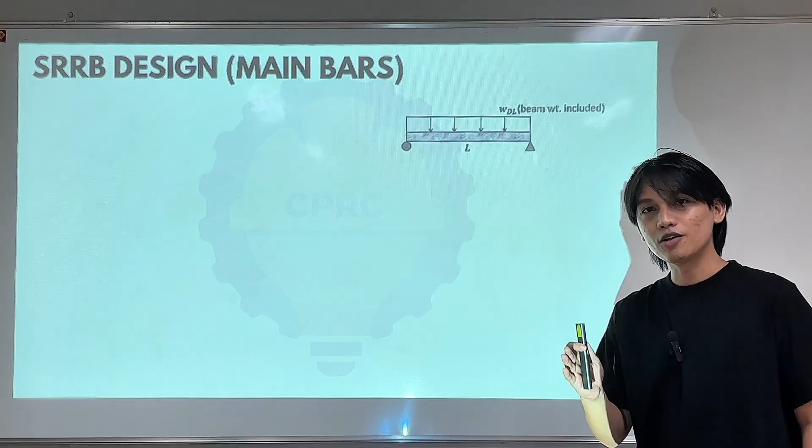Let's say we have a simply supported beam with length L, with a uniformly distributed dead load including the weight of the beam, and a point live load. We are tasked to design this as a singly reinforced rectangular beam.

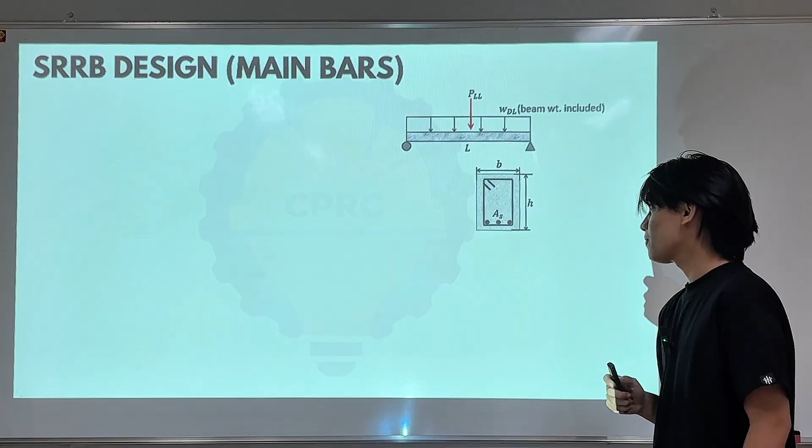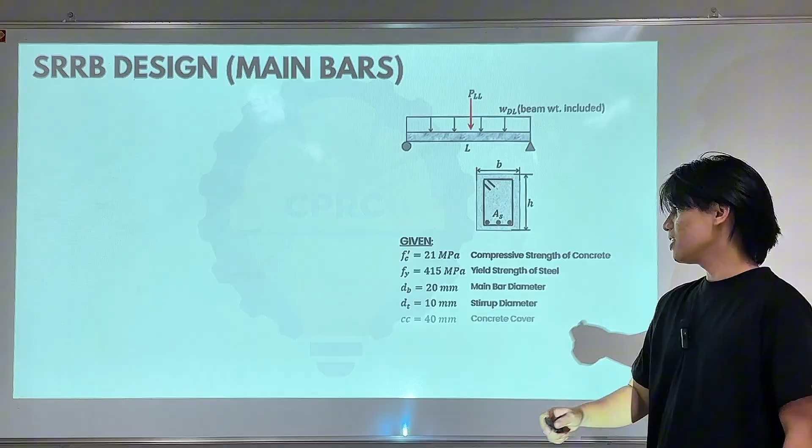Let's say given to us are the dimensions, the width and height, the strength of the concrete and steel to be used, the diameter of the main bar and the stirrups, and the concrete cover. If the concrete cover is not given, we should memorize that value - it's standard at 40 mm for beams.

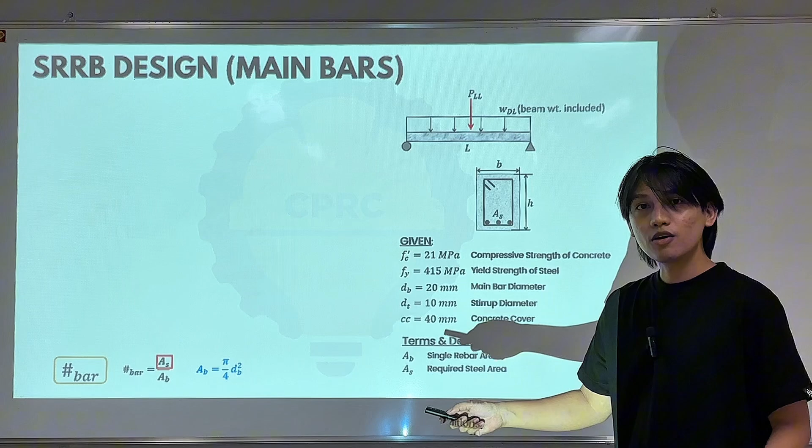So let's focus on that. How do we solve for AS? To solve for AS, we just need to use our analysis and design formula in LRFD, which states that our ultimate moment MU should be less than or equal to our factored moment capacity, phi MN.

Let's expand this. MU and phi we retain, while MN we expand into that expression.

Now where did this expression come from? Quick recall - it comes from our stress diagram, where our tension force is moment-summed with our compression force, and that is simply equal to As times Fy times D minus a over 2.

We used Fy here instead of Fs because we are designing the rebar to yield for a safe design. And the 'a' here, we express in terms of the sectional property.

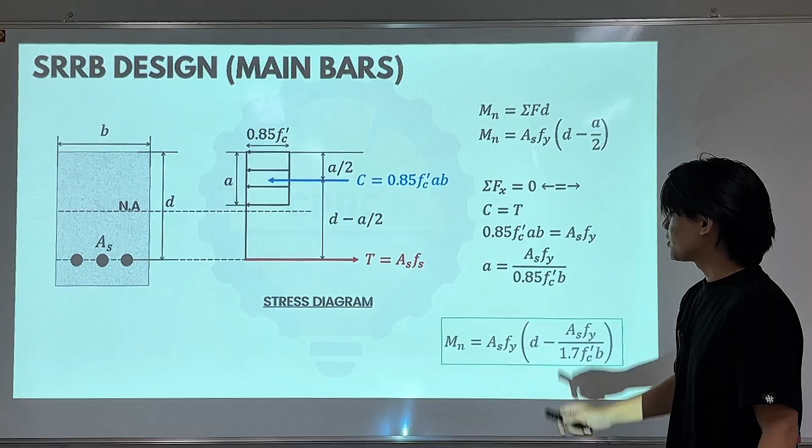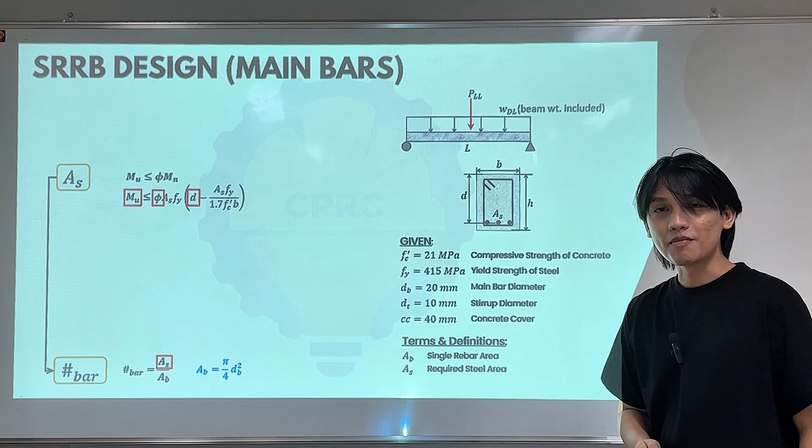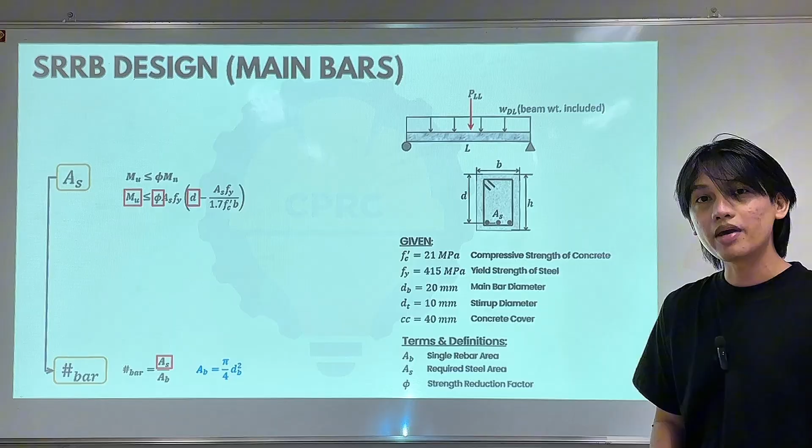So now let's go through them one by one. To solve for phi, the strength reduction factor, we actually don't solve for it - it already has an exact value. For design, that is simply 0.9, which we use to ensure the steel yields and the section is under tension control, which is the safest design. Next is D.

D is simply the effective depth, which is measured from the uppermost fiber to the centroid of the rebar in one layer. To get this, we just need to subtract D prime from the total height.

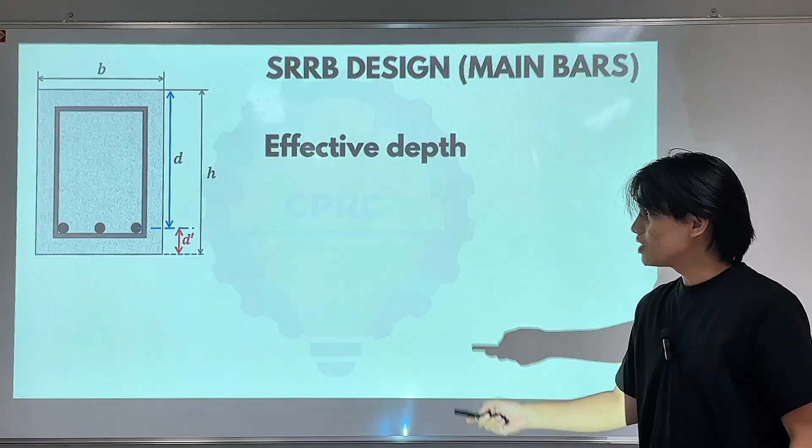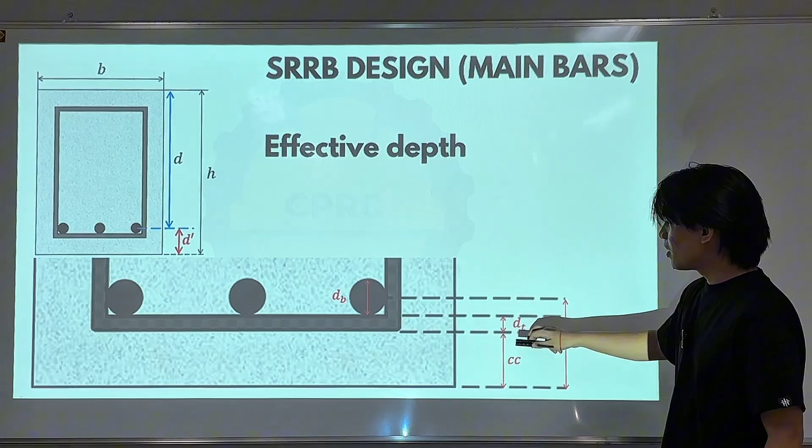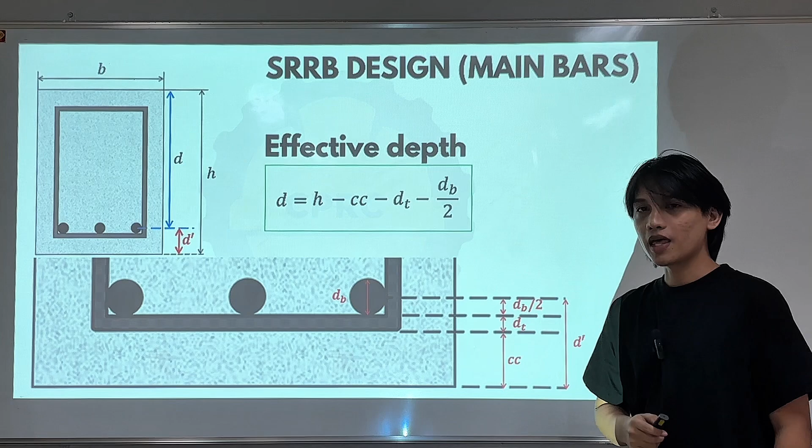This D prime includes several components. Let's enlarge it - it has the concrete cover, the diameter of the stirrup, and half the diameter of the main bar, which we also subtract. So the effective depth D is simply the height minus the concrete cover minus the diameter of the stirrups minus the diameter of the rebar over 2.

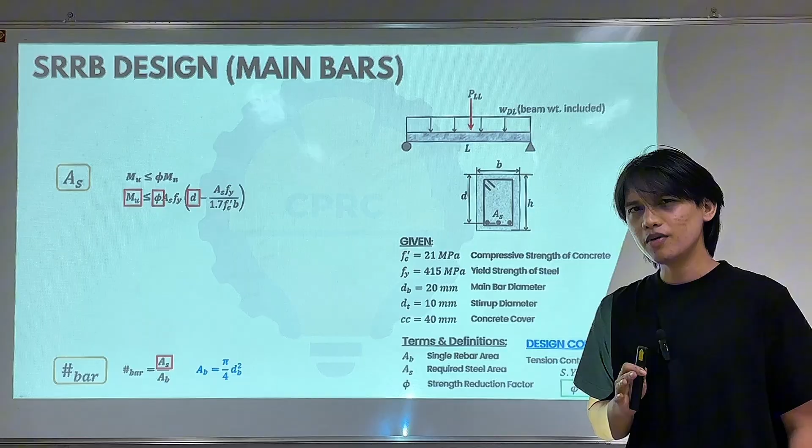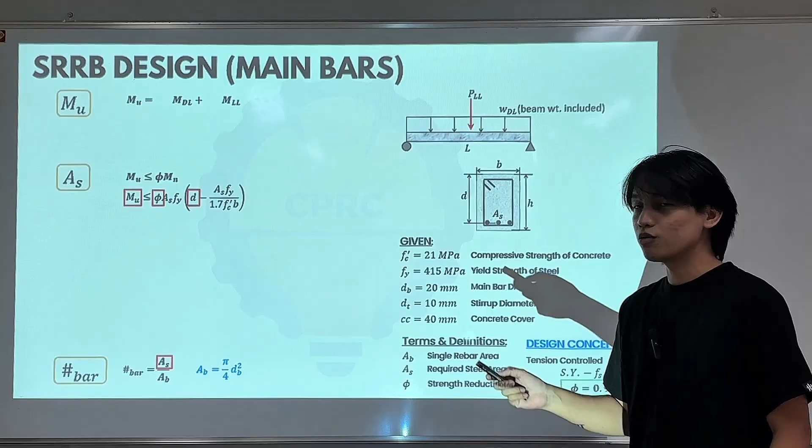Okay, so alam na natin si phi tsaka si d. Ang problema na lang si mu. Now, to solve for mu, that is simply the sum ng moment due to the dead load and moment due to the live load. Pero since we are using LRFD sa pag-analyze and design sa RCD, meron tayong isasama dito na load factor. Ang load factor natin for the combination ng dead and live is 1.2 para sa dead and 1.6 para sa live.

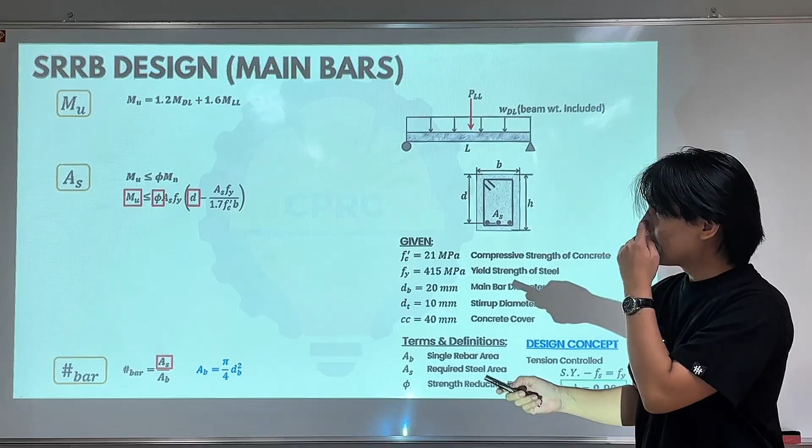So kung iisipin natin to solve for MU, ang kulang na lang natin dito is the moment due to the dead load and moment due to the live load. Para masolve yan, that is simply based sa loading na given. Iba-ibang loading, iba-iba ang way kung paano i-calculate yan.

So to calculate the moment due to dead load, titingin ka lang sa dead load. In this case, ang dead load natin is uniform load sa simply supported beam. Pag nagsosolve tayo ng moment, we need to consider the maximum palagi. Ang maximum moment due to this uniform load, I think memorize nyo naman.

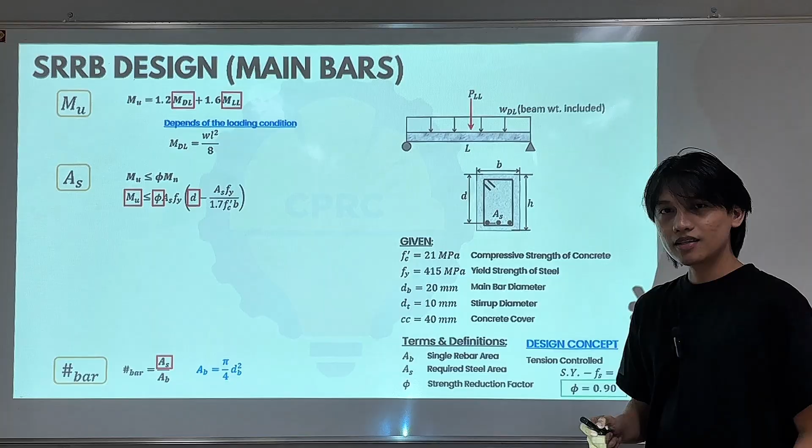WL squared over 8. Next, para naman sa ating moment due to the live load. Kung titignan natin yung live load natin, that is point load, nasa gitna siya nung simply supported beam. At alam natin ang maximum moment na mapuproduce niyan, I think memorize nyo na rin yun, PL over 4.

So inuna natin yung ilalim para alam natin at ma-recall natin yung mga values na kailangan natin para ma-solve ito. Ngayon, kung ayusin na natin yung step natin, ang step 1 is to solve for the ultimate moment. Pangalawa is to solve for the required steel area. At pangatlo, to solve for the number of bars. Yun lang, in 3 simple steps, makakapag-design ka na ng singly reinforced rectangular beam.

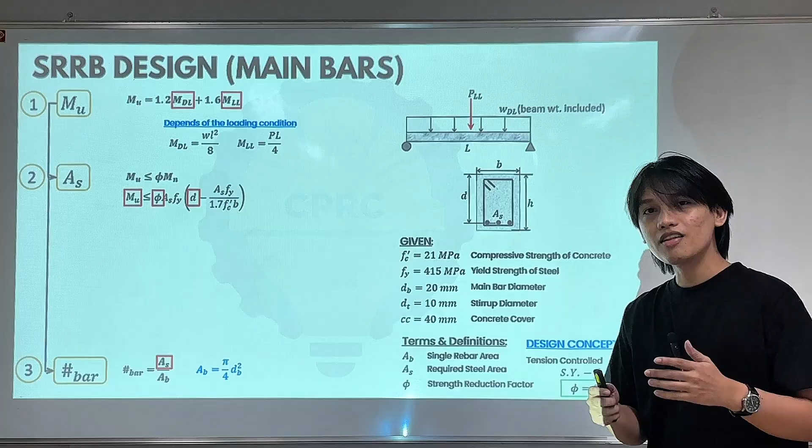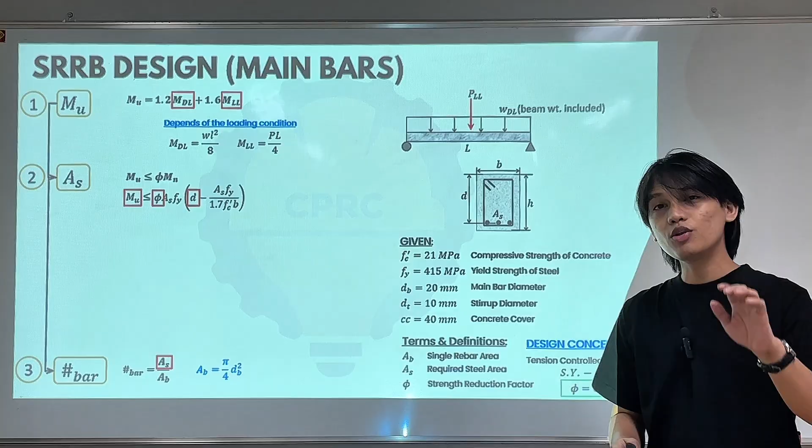Pero wait, may catch yan. Ganito yung catch. Actually, yung masosolve mo dito na actual or required steel area, hindi pa yan yung final steel area. Kailangan mo pa siyang i-check. Iko-compare mo yan sa AS minimum at maximum. Bakit? To check kung nasa tamang range ka, hindi masyadong maliit, hindi masyadong malaki.

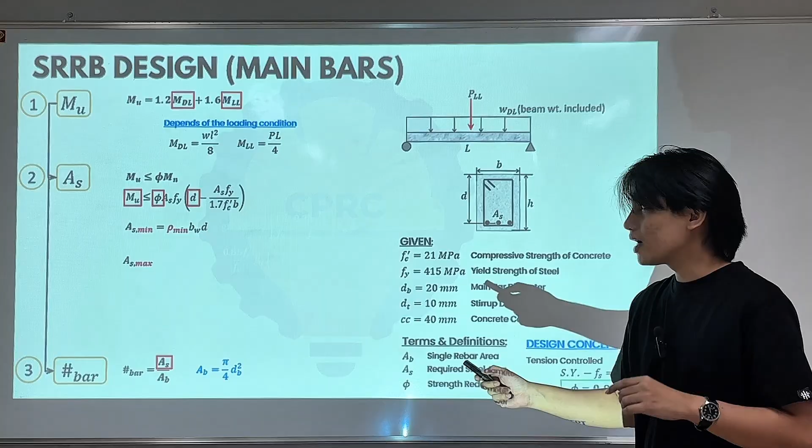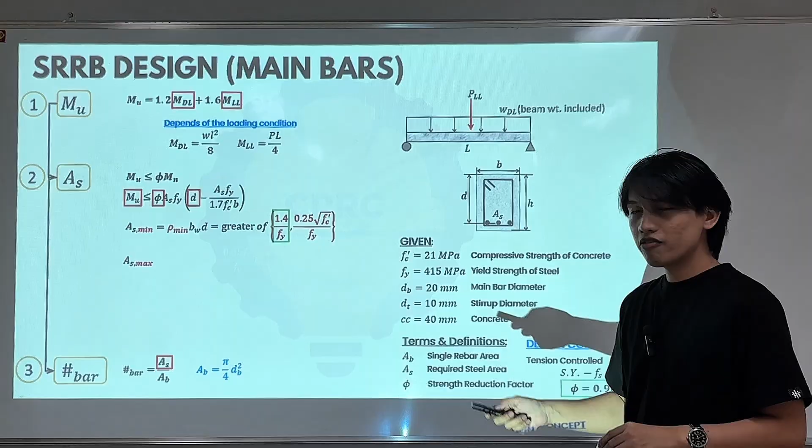Okay, so how do we solve for AS minimum? That is simply rho minimum BWD. Yung rho minimum, to compute that, meron tayong dalawang value: 1.4 over Fy tsaka 0.25 square root of F prime C over Fy. Ngayon, ang pipiliin natin dyan yung pinakamalaki. At ang usual na malaki dyan is itong 1.4 over Fy. Nagiging mas malaki lang ito kapag yung F prime C natin is greater than 31.36 or roughly 32 MPa.

Which is madalang yon. Usually ginagamit natin F prime C is 28 MPa pababa, so ito ang usual na nag-govern. Times BWD, yang BW, that is simply yung B natin pagdating sa rectangular beam. Next, yung AS max naman, AS max is simply rho max BWD. Yung rho max natin, ito yung formula.

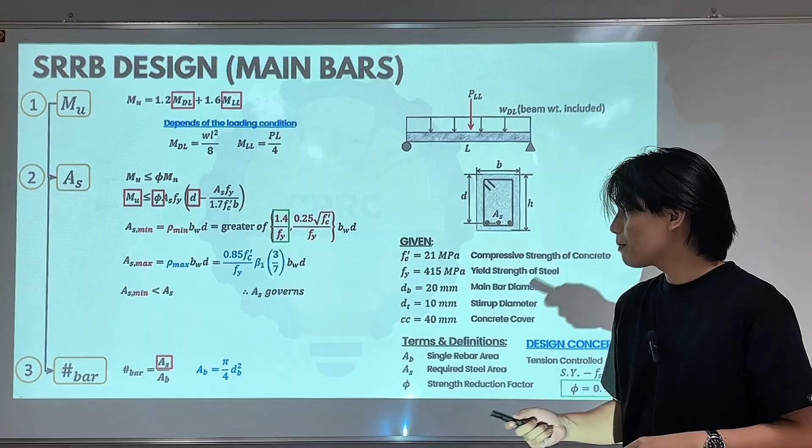Okay, ngayon i-compare na natin sila. So the comparison logic goes like this: kapag yung actual steel area mo is greater than the minimum, okay na yan, kasi mas malaki ka sa minimum eh. So yan na talaga yung sagot, yung nasolve mong AS. Pero i-double check mo lang, dapat mas mababa yan sa maximum.

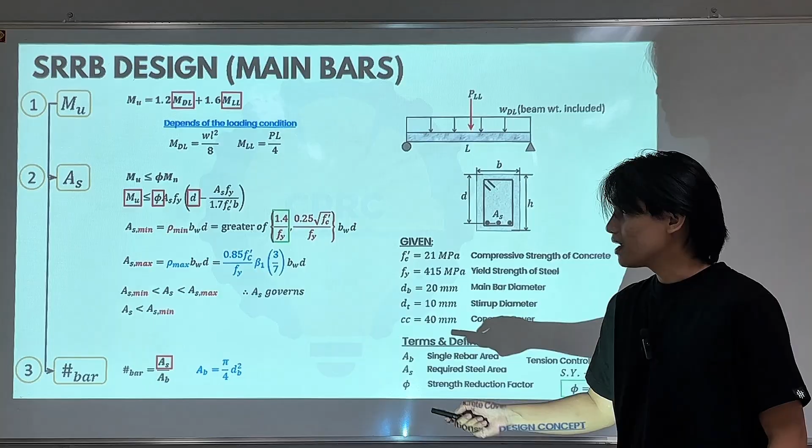Next, what if naman yung AS natin ay mas maliit pala kaysa sa minimum? Since mas maliit siya sa minimum, which is bawal kang bumaba sa minimum, so yung AS minimum ang gagamitin mong area ng steel.

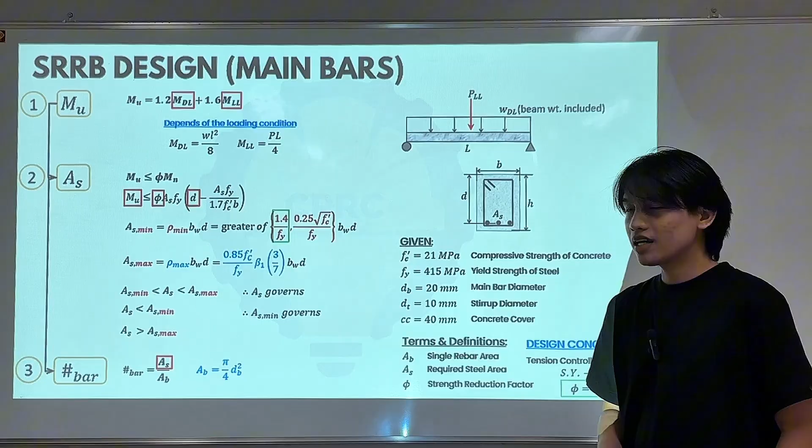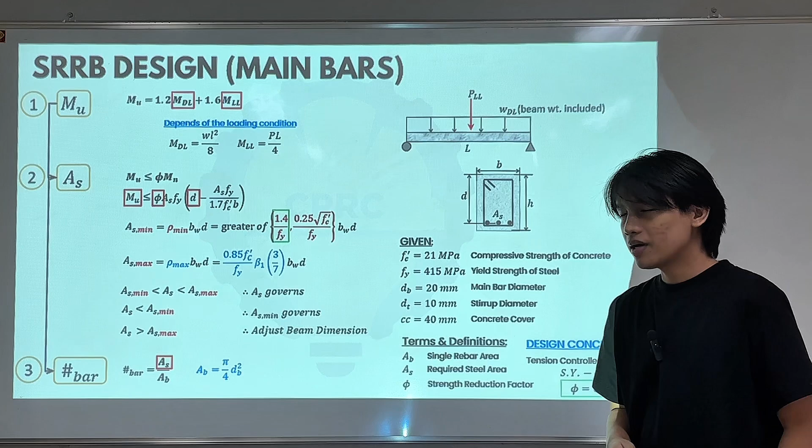Okay, and lastly, paano naman kapag yung steel area mo is mas malaki na sa maximum area? Take note, bawal tayo lumagpas sa maximum, magiging unsafe yung design natin. So pag ganito yung case, dapat i-revise mo na yung beam dimension o kaya i-design mo siya as doble reinforced rectangular beam. Okay, so yun na, tapos na tayo sa pagdi-design ng singly reinforced rectangular beam.